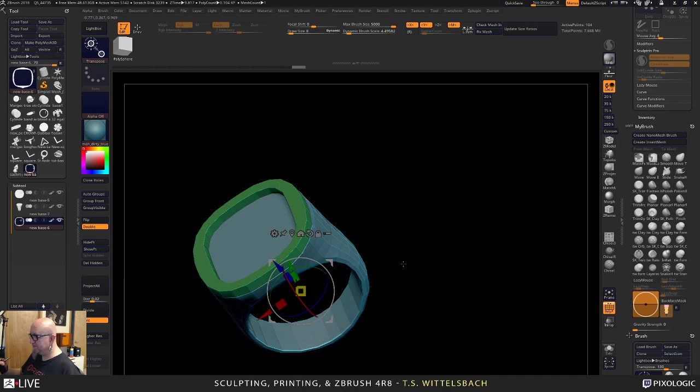Looking okay. A little bit of a slightly roundier offy bevel there. Now let's just take a point, raise it up, and then we're going to drop that in there, and that's going to become an inset part for us. Let's make it just a little bigger.

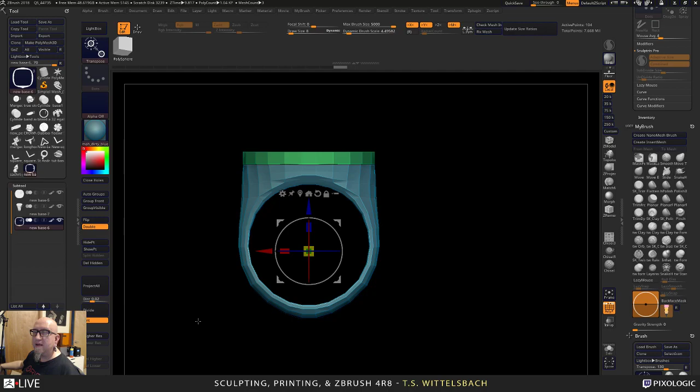Alright. I'd rather have it a little bigger and knock it back than try to, because if it's thinner, this edge is going to curve in, and that's actually a more difficult thing to deal with at the end of the day. Hello, Joan. Okay, now we're going to divide.

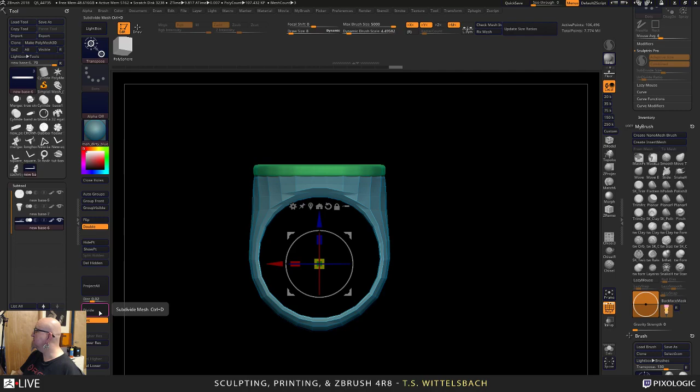Oops. Keep smooth off for a second, divide. That's good enough. There we go. Alright, so this already has a subdivision level, so we are going to high-res this.

How was it? It went to 7. Let's lower that res. Delete higher, delete lower. Come to here, duplicate, and delete lower. So we're just kind of working out the rough shape we want our signet to be.

Okay. And now we have our lovely new remesh by union. Do we want to do that yet, though? Yeah, sure, whatever. Remesh by union.

And now, under normal circumstances, since I'm going to want, we're going to drop that. Let's do this out. We can do 425,000. Is that smoothing? Now, why am I getting nothing there?

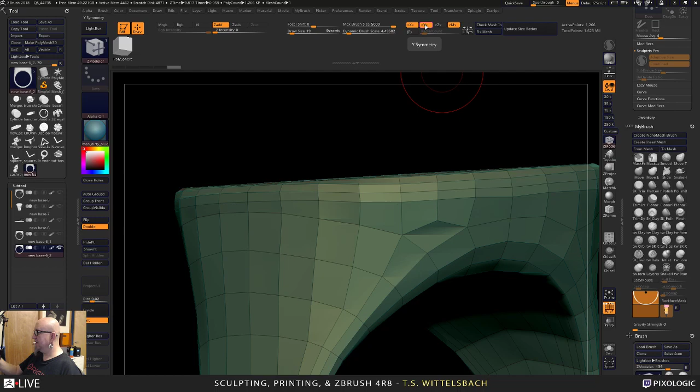So what we're going to do, just for the sake of symmetry, we are going to come into ZModeler. We are going to get rid of... well, let's just turn X off. We'll do it individually.

ZModeler, delete that, delete that, and then all we need to do is put our draw size smaller there. Make sure, see how I'm readjusting it so that dot's sort of in airspace, just so I'm not accidentally hitting another point. See, that's pretty safe.

Okay, and so now we're going to come in here. We're going to go stitch two points to midpoint. And we're going to go boop and boop, and that'll stitch that. Come over here, make sure you're not hitting anything behind it. Boom, boom. There we go.

So now that at least has symmetrical geometry, right? And so now what you can do is mask off this side, because I like that side just a little better. Come over to deformation, go Smart Resymmetry X. And now that has matched this geometry over here. Well, 99.53, so it's pretty close.

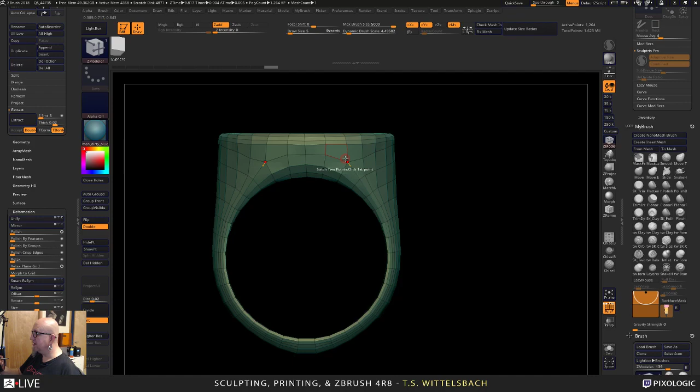Right, so now when we turn X back on, you can see we're hitting points. It's not saying, oh, no symmetry is found. So that's a quick and easy way to get your... ooh, something happened up here.

Yeah, sometimes it's really funny. Smart Resymmetry, you can see that it was trying to match this geometry, but this was far enough away that it got confused. So yeah, just smooth it all back down. It'll get you there, especially since we're going to futz with the center area a lot, so it doesn't matter.

All right, so that's close enough for now. And now this way, when we start dividing, we have nice, clean, symmetrical geometry. I will say that this is not necessarily the most desirable thing, right, how we get this point here. And that might come back and haunt us a little later, but not too much caring about it right now.

Actually, it's super easy to build. I will show you. Ask me later in the presentation, and I'd be happy to. I'll drag it over here. I just have to go get it and stuff.

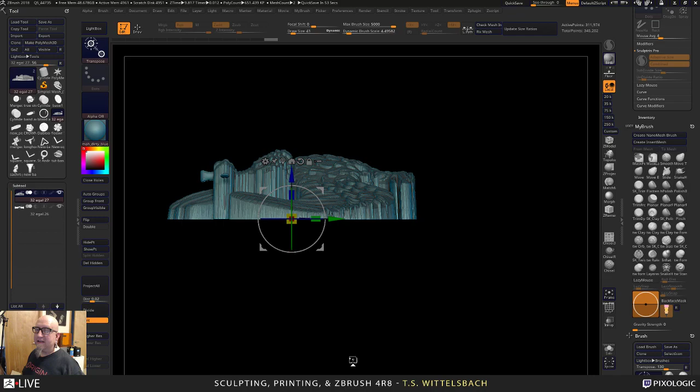What do I use for heat? There's a little plate that you can buy. Let's get through this, and I'll gladly show you that later on. I'll show you all the parts and stuff.

Right? And so you can see that we still have some weirdnesses, right?

So I will come through, I will grab inflate, and turn on X, and just quickly come in and inflate things.

Now what's our count? 311? Yeah, we can do that. You can see we're just trying to come in and fill our holes up a little, so when we do our next step, it turns this into just a big solid as opposed to having these air holes.

Okay, you just run along the edge there, get everyone caught up, filled in. The surfaces just have to tap, right? They just have to barely touch. So when it does, it's going to view that contact point as the filling point, if that makes any sense.

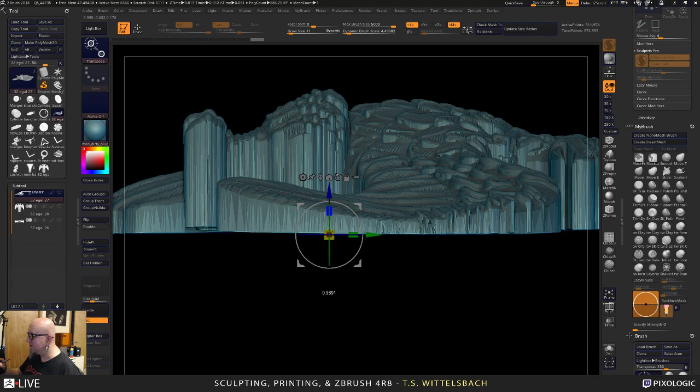Hold on, show part. Because as you see, hold on, W, let's move this down. See how all of these things start laying on top of one another? So this is like worst case scenario you can get when you're trying to do this, because most of the time you're not going to have that much. Every single one of those laying on top of another is a coplanar surface.

So, you know, when your Dynamesh blows up because there are coplanar surfaces, well, that's kind of what's happening. It's just like, oh, what the hell? And it just chokes out. ZBrush does not like coplanar surfaces.

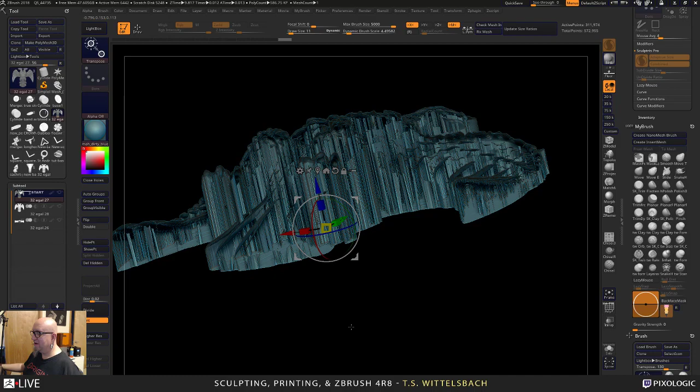But, you know, like I said, this sculpture is probably, oh my God, it's probably at least 4 or 5 years old. So I would build this a little differently now because we weren't thinking about the tools we're using now then. So there are things I would do dramatically differently on this. But so here, let's flip this. And you can see just how much coplanar surface is going on in there. So yeah, you'll blow a Dynamesh up with this as well.

And that's why it's just easier to come in, smooth it out just a touch. We did the union mesh, and now what you do, you split the parts. And this is all of the crap that it left inside that model, right? And so now you have all that split out. You just come back to your original part, append.

Where's our little eagle? There it is. With 59 parts, right? Just get it. And now you have a clean shell, right, that has none of that. Let's flip it. See, it has none of that garbage in it.

And we're going to reconstruct the mesh anyway because we want something that has a subdivision level. So we just come back down to the 58, right, and just delete all. Because we appended the clean model out of it, right? And so now that is a completely usable model. Flip it back. We're at 270,000.

So this is where you can also kind of just kind of break your mesh down a little with, turn on X, sorry. And so I'll get a size that I like. I'm going to smooth it. And I'm using Sculptris Pro, as you notice, so we're just taking this out and I'm homogenizing this mesh a little, because when I Z-remesh it, I don't want the Z-remesh to try to keep...

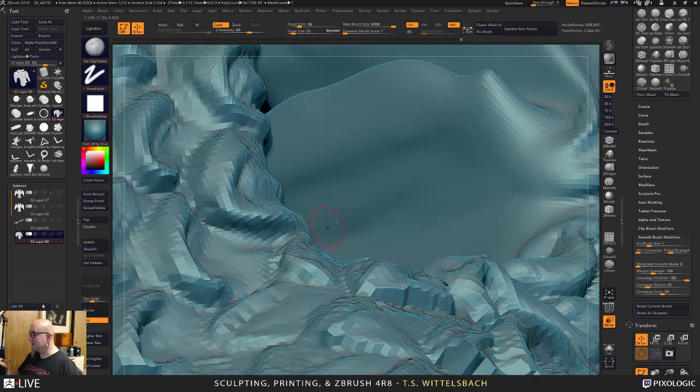But when you get all crappy meshed like this is, that solves a lot of those issues.

Now I'm just going to come over. The other thing to think about when you're remeshing is, once again, ZBrush isn't super excited about coplanar surfaces, right? And sometimes that includes a projected surface.

So if you're going to reproject, you can make it less aggressive than that, but the thing you want to keep in mind is that if it's right on top of itself, like you have a successful projection, and then you reproject again, sometimes it starts to act really weird because it's already on that projection point, if that makes sense.

So sometimes it squirrels out and does weird things. So that's just things to think about when projecting.

I'm just kind of pushing up to fill some of that, because I know that it's gonna...

Those are trouble areas, the beaks were trouble areas. How are these doing? You can see that this is a problem here, right? I'm just going to use move, because once again this mesh really isn't the point of all of this, so I'm not going to be super crazy about it.

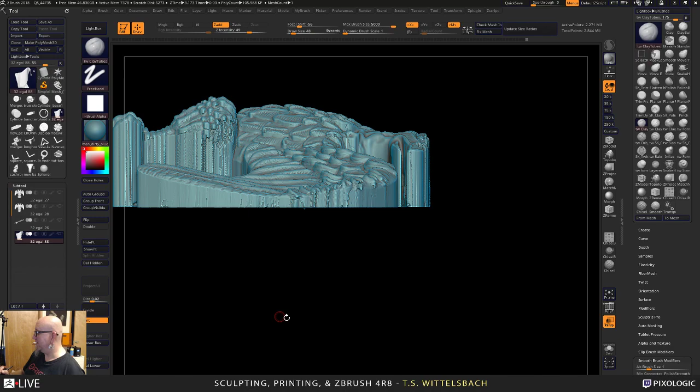Yeah, see, it's still trying to project all those internal shells because that was a complicated shell. So this is not going to be a perfect projection, but that's okay. Now let's just smooth this out a touch.

I'm just going to cut this crap off, trim front.

Okay, so we have our little guy, we have our blade. We now take that, merge down. Where did my merge down go? Am I hallucinating? Oh, I have to go to the above.

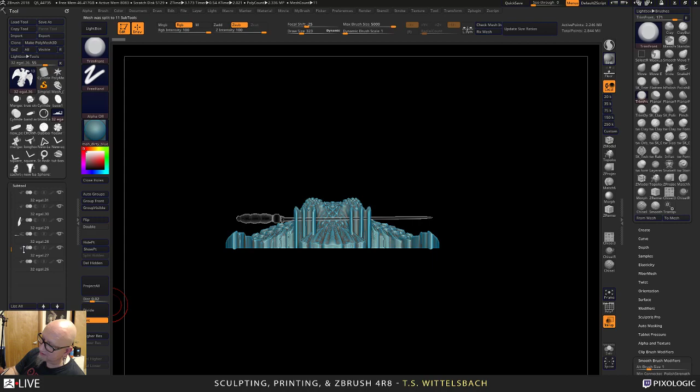Oh look, but it did do a lot of other crap in there, didn't it? All right, that's fine, let's go to here. So once again, we need this to where it's not cutting back. Group front.

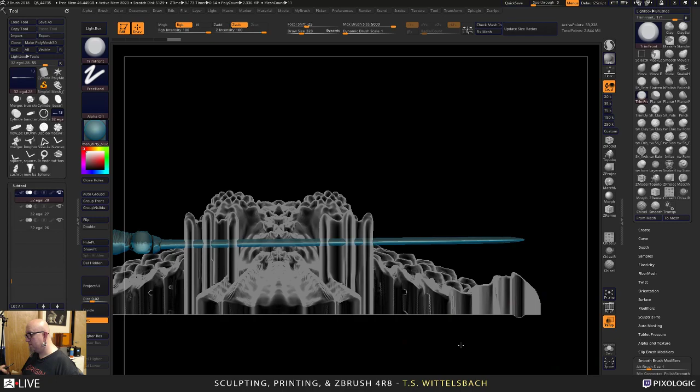We'll look at this again. See, that's one color, that's another. We will tap on the front, mask it, show part, bring this back down. Bring our little line to where we want it to be, and then just drag this back and down.

Now the other thing we're going to do is, this is a little steep for the side of a ring. It's a little deep, I think. Let's look before I make bold assertions as such. Yeah, that's 3 mil tall. Yeah, it's about 4 mil tall, so that's way thick for the side of a ring, right? Let us bring that up here.

Merge down. Okay, so we have this groove. It does not have undercuts. Important. We're gonna come, let's just append it over to here.

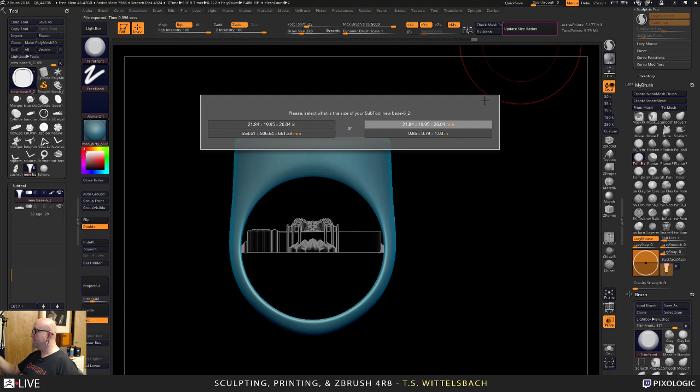Where to go? It's from the side, tricky. How big is this? It's good, not bad. It's not the biggest men's ring in the world, but that's okay. So now that we know we're going to use that, let us come over here and append these guys together.

Alright, so we have our squares and levels, right? Square. Nope, that's a specific square, not what I'm looking for. Okay, we're just going to grab that, bring it down, make it bigger. So there you go, on the square and on the level.

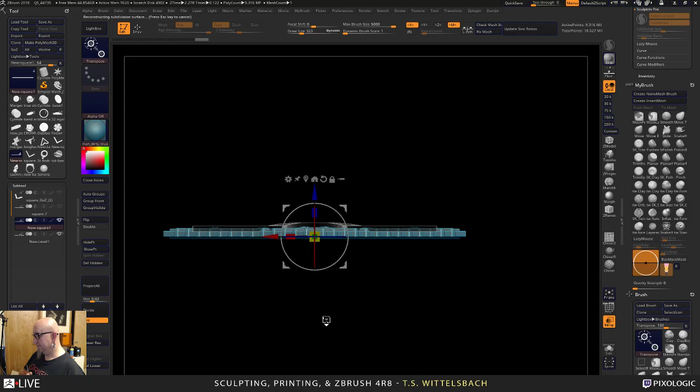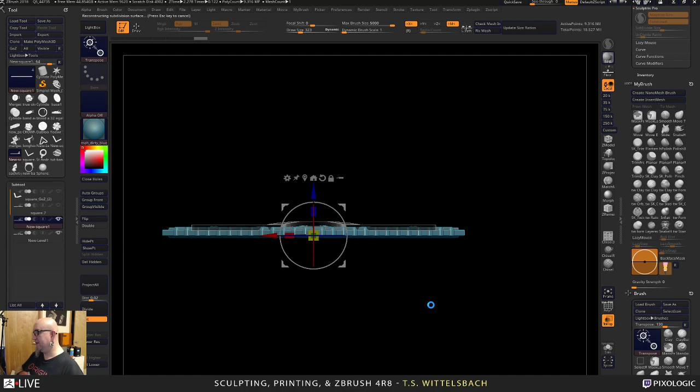Let's merge these down. Merge down, okay. You can do it. Wow, that's weird. It shouldn't be that crabby. Come on. All I'm doing is merging those down. Let's see. It should, we'll give it a second.

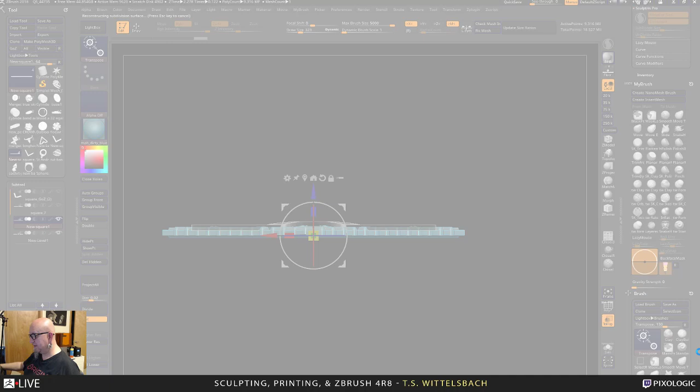I have a feeling this, like I said, might be because I'm using those old models. You can do it, you can do it. Okay, we're not going to wait forever. It's saved recently. Sometimes I just find it easier to kill the thing. We just won't use, we'll use less older models. How's that? So sad.

Everybody look at the magic wheelchair thing. Participate.

Okay. Oh dude, I swear, I kill my poor machine all the time. Alright, let's see, this is going to be an easy recall.

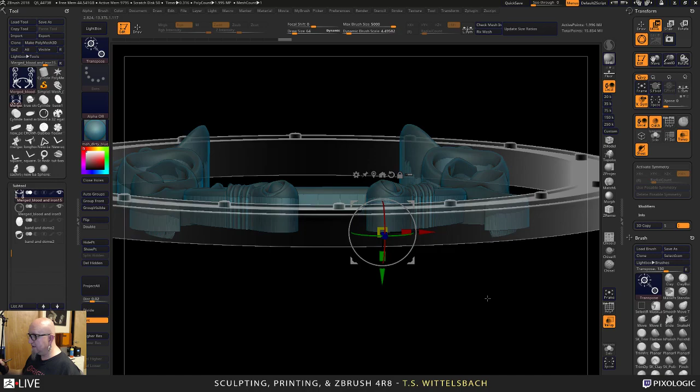That's okay. And now our next is the skull. All right, so the skull's already flat. That's good.

Okay, so let's do this in stages. Come back here. Normally, I'm going to duplicate everything before I start doing this stuff, just because if something happens or if I need to reproject, I can. Once again, this model is not the point of this, so I'm not going to be super picky about it. So now we go remesh by union.

Okay, now let's flip it. And as you can see, there's some noise in there, a little noise. But it worked, it did what it was supposed to do. So there we go, and then we're going to merge the skull down and in. Merge down, okay.

Going to do the same thing, remesh by union. Did it refuse it? No, let's try it again. Flip, sometimes I'm a little jumpy on that. Remesh by union.

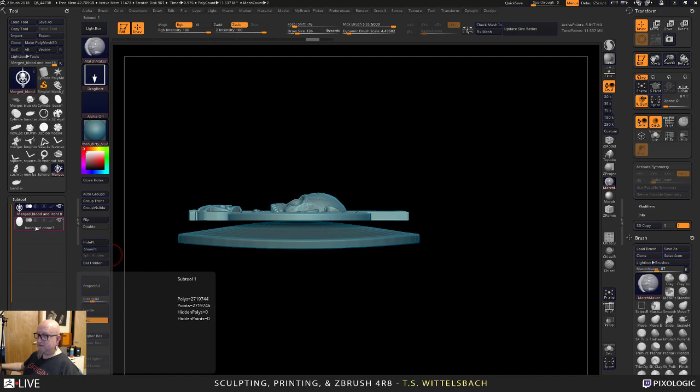Now, I am going to delete this. I just wanted to show you that you can do that, but sometimes you don't want to. It's a clever idea, but it didn't work.

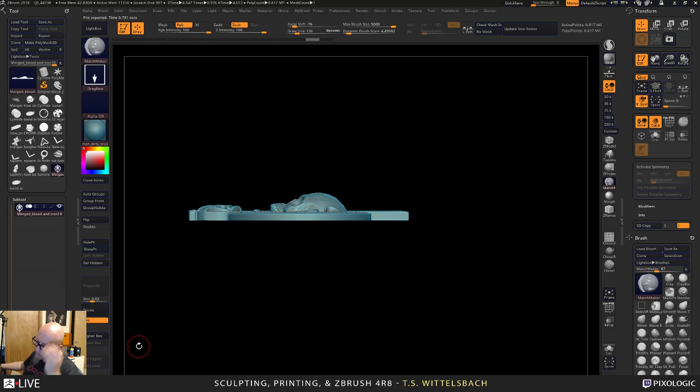So let's delete that. Okay, and so we are going to - how big is this? All right, 3 is fine. And then we are going to append a plane.

W. Get down here, rotate it, make it big. That was real big. And then we just want to bring this guy - what are you doing?

Just going to decide on the depth that I want. All our details there. Yes. So we now have this guy.

Now we just take - I'm just going to use a cube. Open this down. Go to that, go here, come to cube. W. Make it like that.

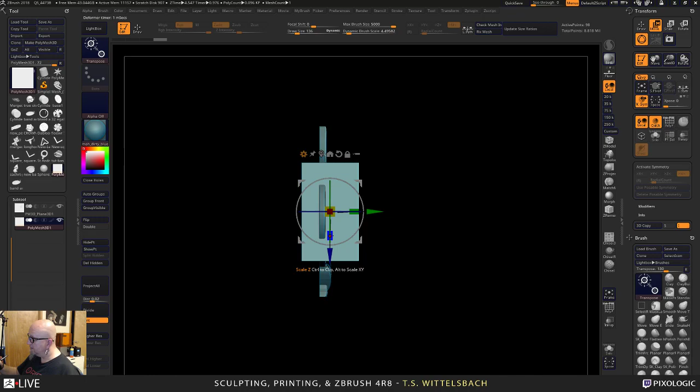Make it like that. Turn on transparency so you can sort of see where you are. You don't want it super bigger. Now, I'm going to leave this out just a touch, and let me make sure we have - okay, we do have some. Now, what I'm going to do here, though, is we're going to drop this, and I'm going to insert some geometry, okay?

Come on. ZModeler. Turn on X. And I'm just going to bring these lines out to where we are sort of covering all the bases on our frame, and then we're going to drop one in here, so that's like that, and that's like that, and that's like that. So we can isolate the interior surface, or the interior image, right?

Because - slide, oh, that's it, there we go. Just give it a little room around everybody. All right, that's okay. And I'll show you why we'll need that in a bit.

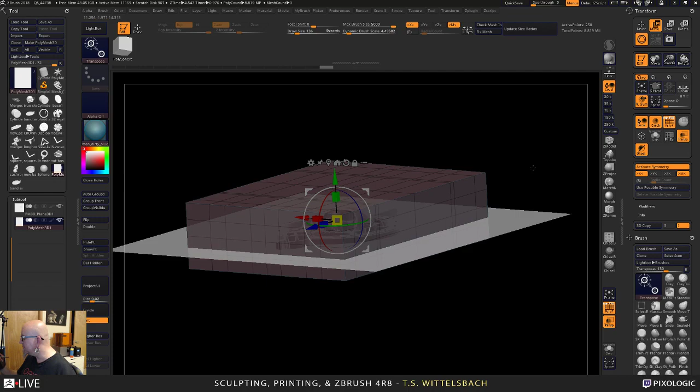So we're going to take this, W. I'm going to eliminate these. We'll do that in a minute. I don't want to be too deep about all this. Okay, okay. And now, go back to the ZModeler. Let's get rid of these.

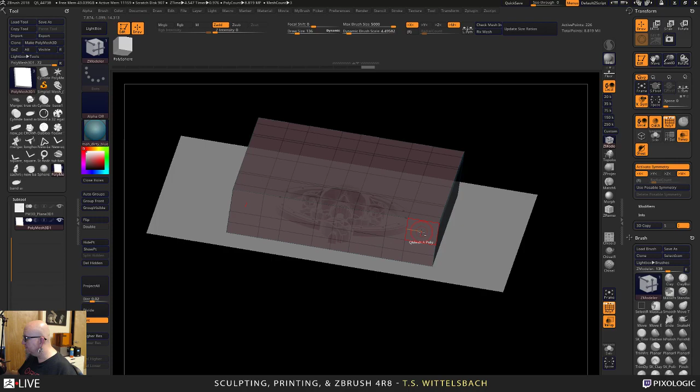So now we're just going to take this on top, start, Boolean negative, we'll hide that. We will turn these two things off. We will turn live Boolean on. And we have our negative. All right, so make Boolean mesh.

Well, hello. How's it going? Sorry, I didn't see that. From Chile, awesome. Chile's nice. Good stuff. Spent a few days there with Tomas. All right.

Oh my gosh, you are just giving me grief. Okay, so they kicked it out to this again, right? See how it's separated out? I always give it a shot - so basically what it's done, it's rejected this. It's like, oh, I can't do it, it's too confusing. But you notice it tried. So we still have our same preview. Every once in a while, just give it a shot and do it again.

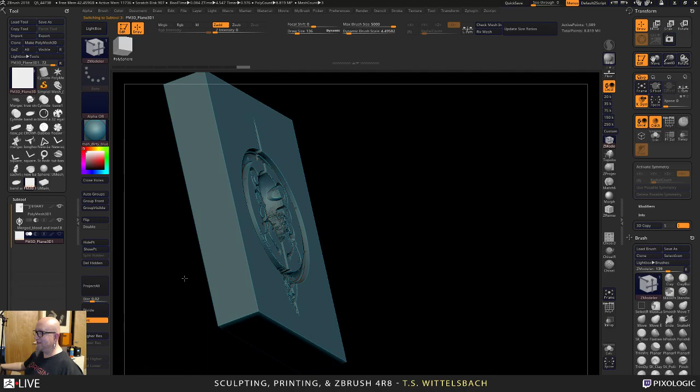So this is a plane, right? So it doesn't have a back, that is not a legitimate mesh. So union mesh looked down past it. And how you can stop that is you could just put start here and then it'll stop, or you just take this and move it above the start, right? So why this rejected the first time is because it went down and then it saw this plane.

The plane is only one normal, right? It's not three-dimensional, it literally is just a plane. So it didn't view that, so it kicked us out to this. And so often it will remove what the problems are, just run it again, and boop, now we have this.

And so the point of this - that's not what I was doing, turn this back on - is, so now let's say let's go back to this ring, and let us append that in. Boop.

Turn that off. Rotate that around. And we're going to rotate it this way. And then we're going to scale it down. And we're going to bring it over here.

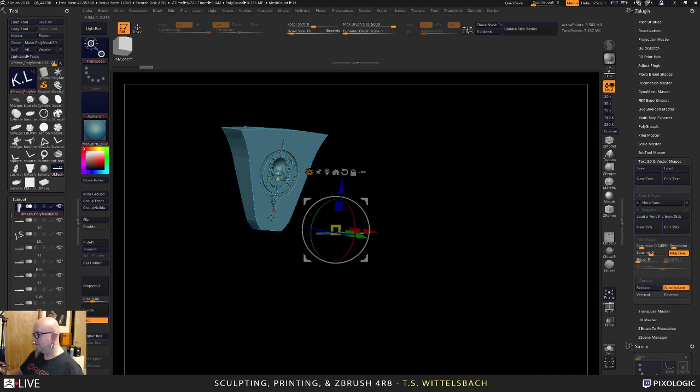Boop, and there we go, it's 90 degrees. It's now facing kind of not the right direction. Killing me here. And let's go to center, and let's go home. Okay, that's a little better.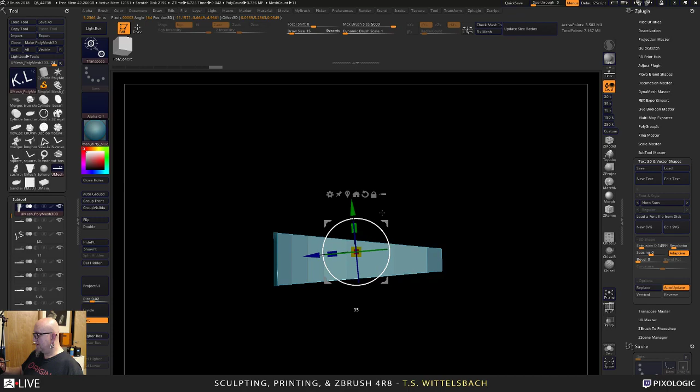And we'll do that. We should, no. You have to hold down before you do that. Okay, normally...

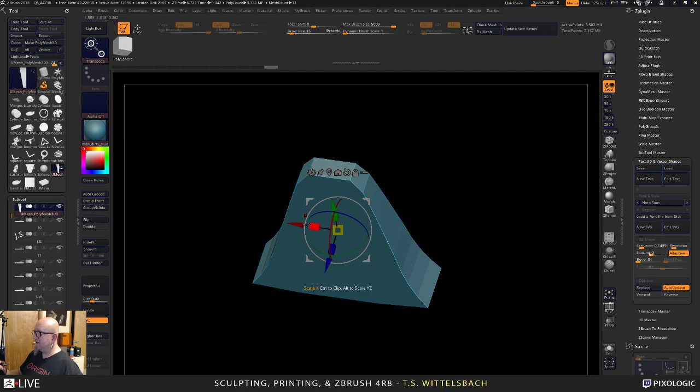If you are rendering to keyshot, remember that this is your axis. If you hold down, hit Shift, or hold down Alt, hit the orient. Your orientation is blue is pointing towards the camera, red is off to the left, and the green is pointing up. So this is front as far as keyshot is concerned.

So now we'll rotate this around 180, come on. We will flip this around 180, there we go. And we're going to pull this back just so we can see our letters.

Let us hide this. Nope, let's just go to 10. All right, so that's the right size. So now I'm going to do a mass change here.

Since we have all those guys and these are the only two, we just hide the, go back to 10, hide these. And I just want a rough idea, so those are about twice as big as I really want them. So hide this again, turn this onto everybody and drag it down.

And just double check, you're like, okay, hold on. Let's drag these up here and let's just... All right, probably want it a little bigger.

All right, now I'm going to bring them back to home real quick. Oops, isn't that funny? They don't want to move to home together. Okay, then we won't do that. That's close enough. Now the other thing I want is I need some thickness.

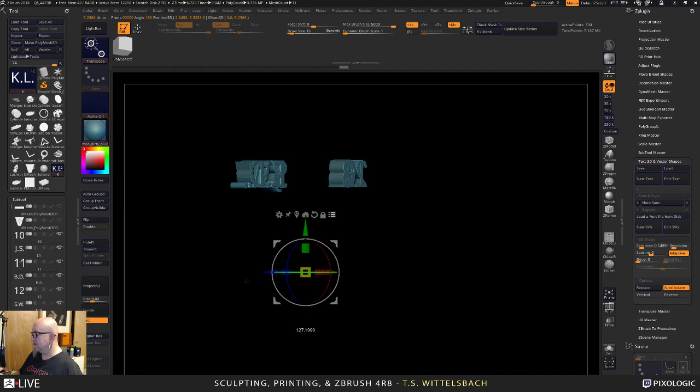So the thing we have to remember is that this is a negative. Right now we're looking at these in positive, so let's hold down, go to home, and we are going to turn that off. We're going to rotate all these to 180, because we need them to be negative, so when it presses, it'll be positive.

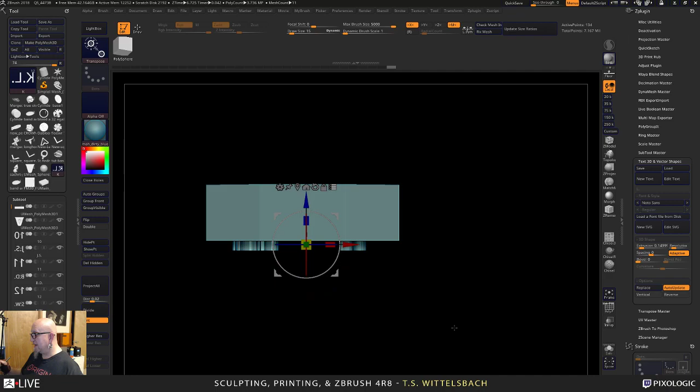And turn that off. Let's slide this way a touch. All right, close enough to spit on. And now let's turn on transparency and just see what our depth is.

Okay, we're going to want a little bit more than that. Yeah. All right, that's going to be more than deep enough.

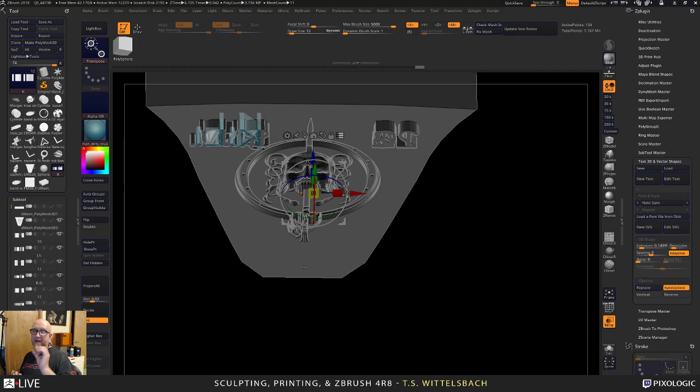Normally, you don't want your depth to be more than the thickness. Like if it's a millimeter wide, you usually want about a millimeter deep. Keep it even. Otherwise, you get these little centers of A's and stuff, and they'll snap off in the molding process.

All right, so now you have all these guys. This is a super easy way to make really custom things, like if you have things that are changing, like a player's name. So you go start, and we'll turn everybody off, turn start off, turn that on. Now turn start, and now we just bring 10 and JS on.

We turn off transparency. Nope, we have to make all of these negatives so they will cut in.

Right, so now you have one JS. All you do is make Boolean mesh.

You can do it. You can do it. Yeah.

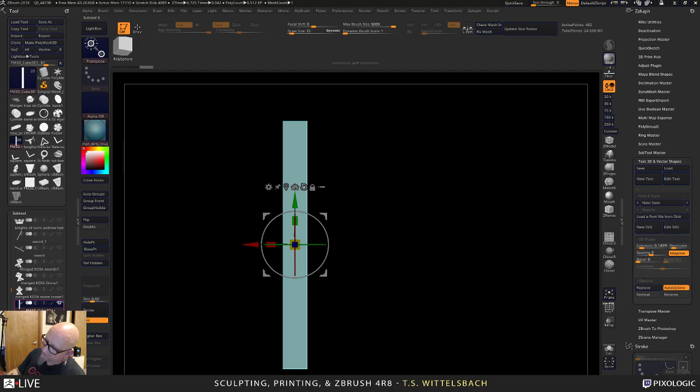Nope, wrong one, make sure you select your cube. No, that's funny, is it this one? Nope, is it this one? Nope, is it this one? Yep. No.

Now remember when I was here and I was saying, oh well, it's easier to do this curve? That is because we don't want undercuts. So when we come back to, oh goodness, is that one?

Yeah, when we come to here, let us bring that up. Start, negative. You have your little guy straight.

Make Boolean mesh. It might be crabby about this because there are lots of holes in that. Keep your fingers crossed.

Is it thinking? Did it just reject that? Hmm?

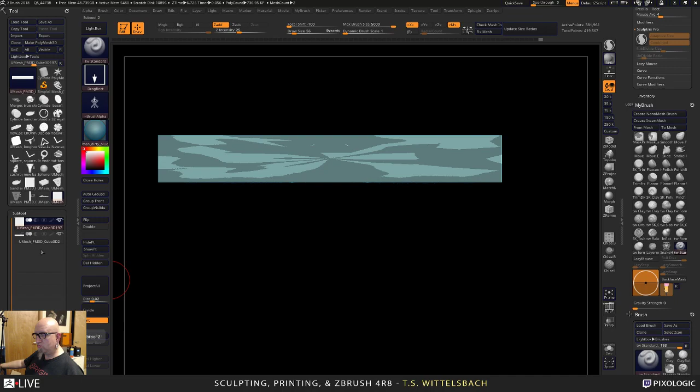So we go append, plane... no, that's not what I was trying to do. I just appended the same thing. Ah, goodness gracious.

Append, plane. Come to plane, turn on transparency. Okay, there's my plane, all right. Now the thing to remember is don't change the scale of your plane.

I did that the other night, and for some reason it was being really dramatically painful to me. All right, so let us go back to you, and we're going to turn X off and scale you down a little bit. Where'd the tool go? And back to plane.

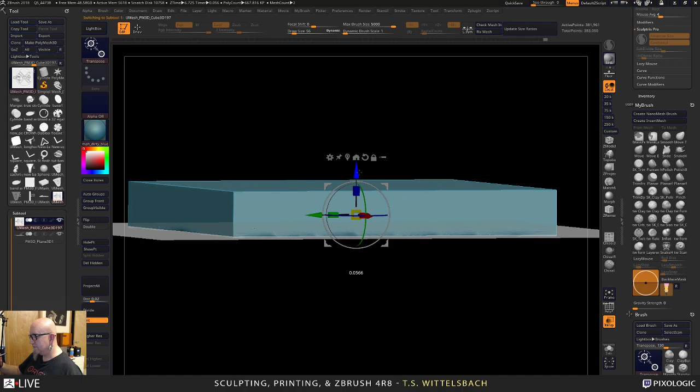Now, this seems like this is going to work, doesn't it? Like if we're going to project to this. But that's a positive - here, let's see, this is a positive normal, right? So if we're projecting to that, I don't think this is going to work.

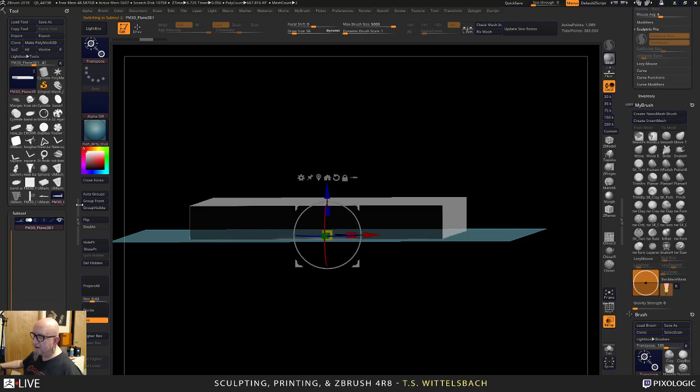All right, we just projected, and it did - oh, we have no geometry. Sorry. So let's go up, but let's lower res. Let's start our projection there.

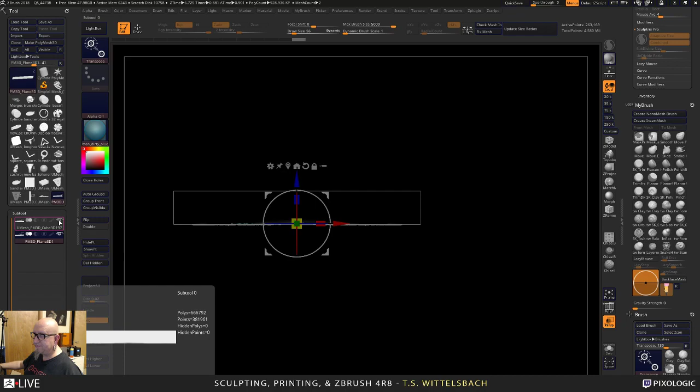And so if we project all, you think it's going to project up into that, right? It's not, because it is projecting to... I was going to leave a little. I'm a mess right now. When everything starts failing, you just ugh.

So did you see what happened there? Okay, hold on, let's go back a couple. Did you see how our plane - see how it tried to project, but it didn't? It's because, remember what I said earlier, projection is trying to project to the negative normals. So we flip this, right?

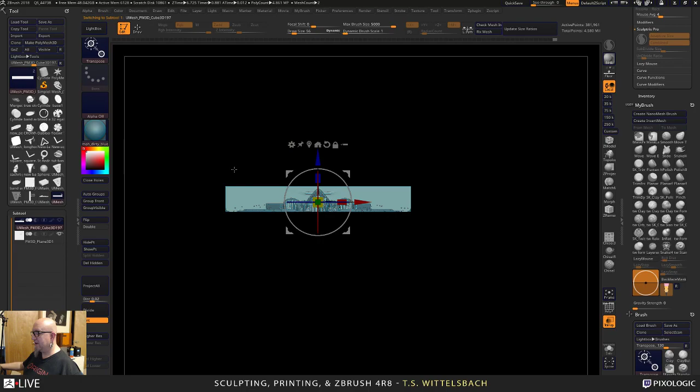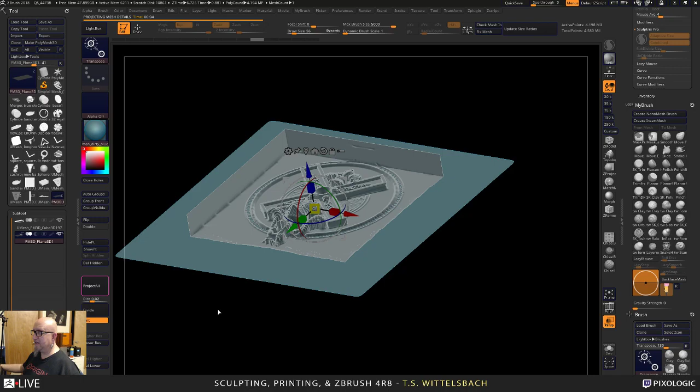And now watch what happens. Let's bring this up just a touch so we're right there, right? And so now when we project - see how much longer it's thinking. It tries to get up in there, right? You can see it's projecting to what it can. Its projection distance is a lot less than that.

And now we can try undo - don't just reproject because it gets weird. Undo, there we go. You can try to kick up your projection distance, and on something this clean and flat, it might do some. Get us a little farther than we were. Right? That wasn't bad, actually. Look at that, so you can see where it needs to come up. Drop that. Okay.

Lower the res a little. Let's use clay buildup so it comes a little quicker. We just want to get this stuff up and in a little more. Smooth everybody down. Shut back on.